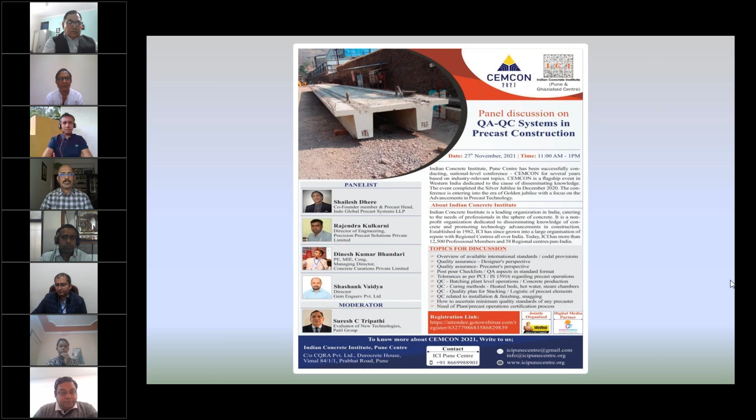The panelists for the discussion are Mr. Shailesh Dhere sir, who is co-founder member and precast head at Indo Global Precast Systems LLP; Mr. Rajendra Kulkarni sir, director of engineering at Precision Precast Solutions Private Limited; Mr. Dinesh K. Bhandari sir, CEng and managing director at Concrete Curations Private Limited; and Mr. Shashank Vaidya sir, director at Gem Engserv Private Limited.

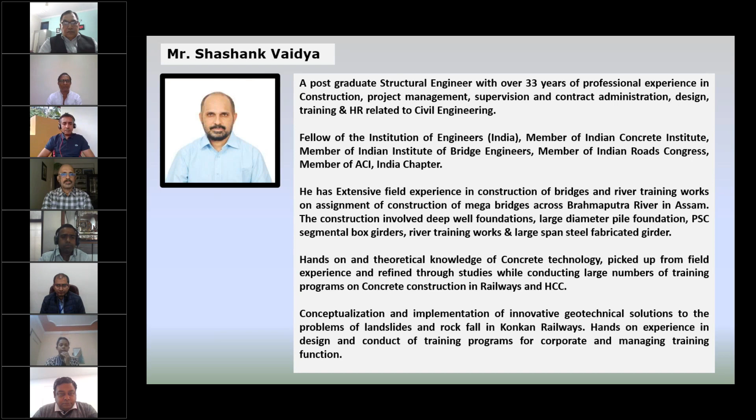Now, I would like to extend my greetings to distinguished dignitaries present with us today. We have Mr. Prasad Sevekari sir, Secretary for ICI Pune Center; Dr. Vineet Bajaj sir, Treasurer for ICI Ghaziabad Center; and Mr. Dhananjay Bhosle sir, Convener for CEMCON 2021.

From the Executive Committee members of ICI Pune and the CEMCON organizing team, we have with us Mr. Mangesh Hardas sir, Mr. Amit Hardas sir, Ms. Sujita Kalwar ma'am, Mr. Ramesh Kulkarni sir, and Ms. P. Usha Devi ma'am. We also have with us Engineer Vipin Chaudhary sir from Ultratech Cement Limited, who is Regional Head for Technical Services of UP1.

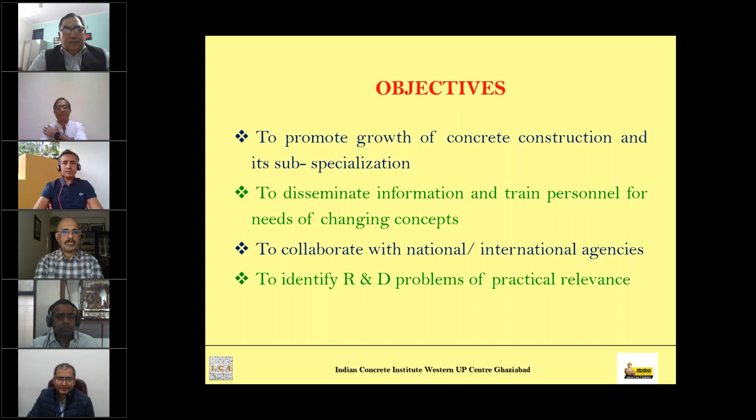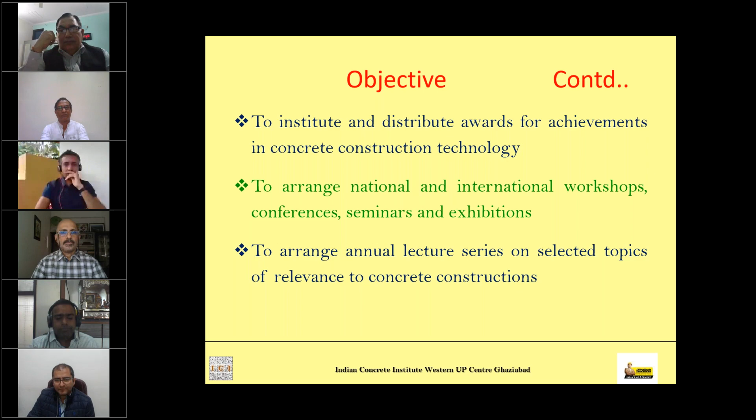In addition to this, we are also involved in instituting and distributing awards for achievements in concrete construction technology, so as to promote in-depth research in concrete, to arrange national and international workshops, conferences, seminars, and exhibitions, providing a good platform for our young generation to understand the importance of concrete and the need of the hour - how we can work on improving various types of concretes - and to arrange annual lecture series on selected topics of relevance for concrete construction.

Here is a list of the webinars which ICI Ghaziabad has conducted in the past 18 months during COVID time. The foundation basically happened on 29th of May last year. We had a 3-day international webinar on durability design and construction aspects of bridges in association with CRRI, where 18 lectures were delivered. Since then, we have been regularly organizing webinars on Saturdays, and this is in continuation to that.

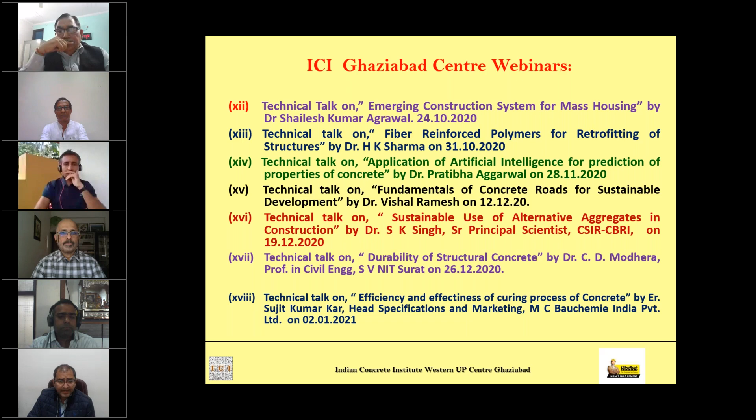Last week, this list continues, I'll skip this because of time paucity. So last week we had a technical talk delivered by Engineer KP Abrahamji, former CPWD Chief Engineer. That was our 90th lecture, titled Tale of Two Temples, and this happens to be our 91st lecture.

So for those who have joined late, today's topic is a panel discussion on QA-QC systems in precast construction. The panelists are Shailesh sir, Rajendra sir, Dinesh Kumar sir, and Shashank Vaidya sir, and the moderator for the day is Tripathi sir.

In addition to the various webinars, 7th of September happens to be the birth date of ICI concrete, and therefore September across India is celebrated as concrete month, because various technical events are happening across India. ICI Ghaziabad celebrated its concrete day on 12th of September. Sanjay Pansar from BIS, Bureau of Indian Standards, was the chief guest for the day. This is the photograph of the inauguration ceremony.

Annual award function on the concrete day - these were the few recipients of the various awards. I'll be sharing the list of the awardees, the types of awards which are being distributed on concrete day. A few of the photographs.

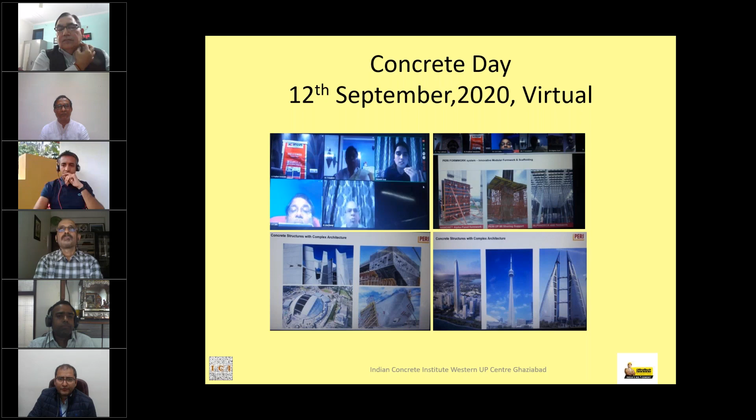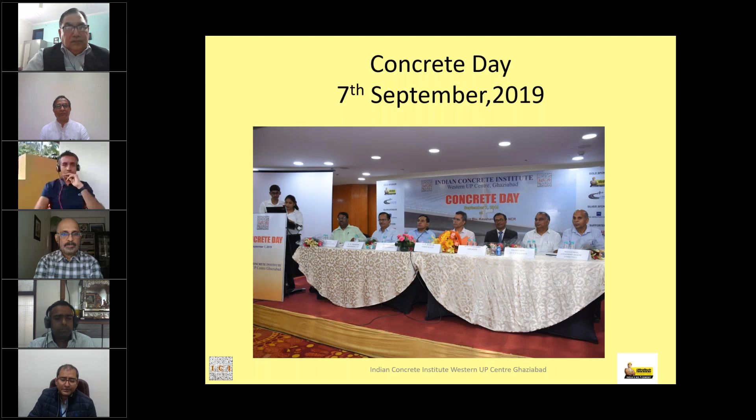Concrete day celebration last year, that was 2019 on 7th September. That was the concrete day celebration, and a few photographs. We have the chairman of that time, and chief guest for the day was KP Abraham sir.

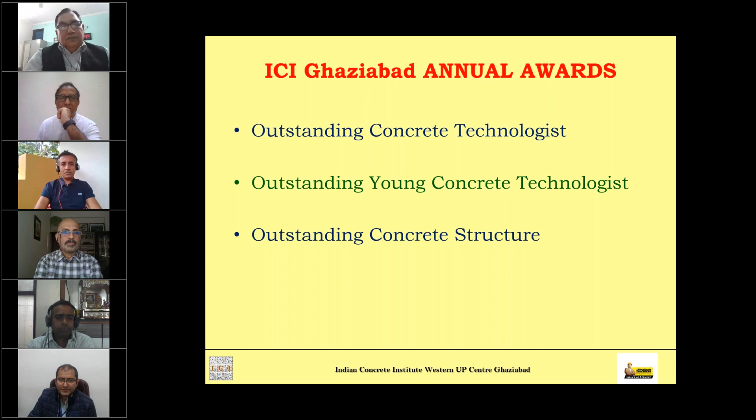ICI Ghaziabad annual awards include outstanding concrete technologist, outstanding young concrete technologist, and outstanding concrete structure. These are a few of the recipients of outstanding concrete awards.

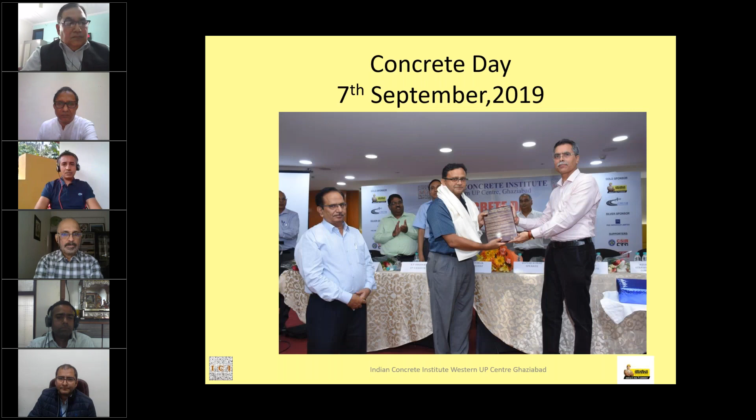The conference organized by ICI Ghaziabad was the repair and rehabilitation of concrete structure at Ghaziabad, held in May 2011. After that, we organized an international conference on trends and challenges in concrete structure, again in Ghaziabad in December 2013, wherein we had participants from across Europe, the Middle East and the US also.

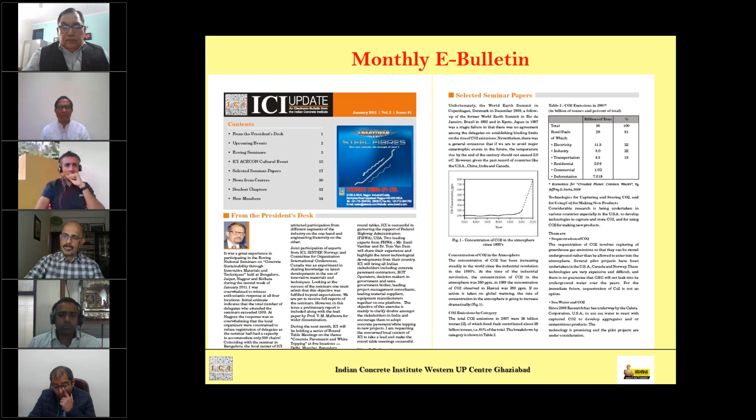We share an e-bulletin with all our members. Each member receives an e-bulletin each month with information related to what has happened in the past month in the field of civil concrete, not only in India but across the world.

The Technical Committee of ICI was constituted to formulate unified codes, standards, guidelines, and handbooks. Various ICI members are also part of BIS technical committees, working cohesively to improve the codes, standards, handbooks and guidelines. A few of the ICI technical codes cover fiber reinforced concrete, precast construction of buildings, concrete admixtures, unified code for concrete construction, recycling of aggregates, decorative concrete, alternatives to river sand, concrete durability, and concrete flooring.

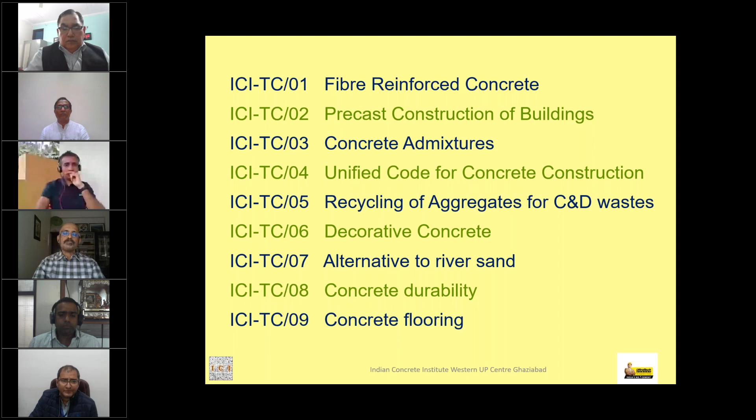These are available on the website. Those who want to purchase them can go for it.

A handbook has just been released, on waterproofing of concrete structures. In the past 1.5 years, there have been regular webinars, not only by ICI Ghaziabad but other chapters also, on waterproofing, understanding the need of the hour.

It's available for 1,500 rupees including postage charges, and discounts are available for members, or if you want to buy in bulk. All these details are available on the ICI website, and those who want to become a member of the ICI body can also visit the website.

There's an e-learning portal for education and training. A job portal is available for students who are members, where they can find new available jobs in the field of concrete or at sites.

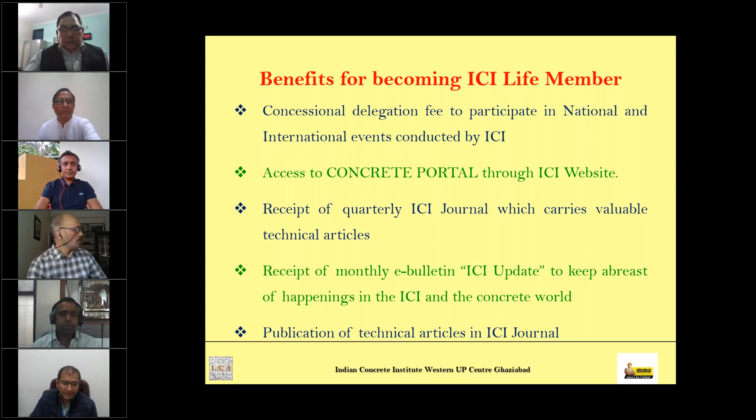Benefits of becoming an ICI life member include concessional delegation fees to participate in international and national conferences organized by ICI, access to the concrete portal on the website, receiving the quarterly ICI journal as well as the e-bulletin, publication of technical articles in ICI journals, publications at concessional rates, access to the ICI reference library, and support from ICI to conduct training.

As a professor at SRM University, I'll add that once our university became an ICI member, they helped us organize various industrial visits, and this is one of the supports provided by ICI, with webinars free for my students to attend, along with participation in ICI technical committees.

Above all, ICI events provide a uniform platform to learn and share the best practices in making good concrete, where sellers and buyers meet together.

Benefits of becoming an ICI organization member include concessional delegation fees for institution members, receiving 2 copies of the quarterly ICI journal, and receiving the monthly bulletin.

Regarding the student chapter, the clear objective is to bridge the gap between knowledge and practice, that is academia and industry, to keep students informed of happenings in the field, and to prepare them to face challenges in their career.

Through ICI web events, wherever there are chapters, student chapters are invited to participate in various events, thereby helping them directly interact with academicians, industrialists, industries, or consultants working in the field of concrete.

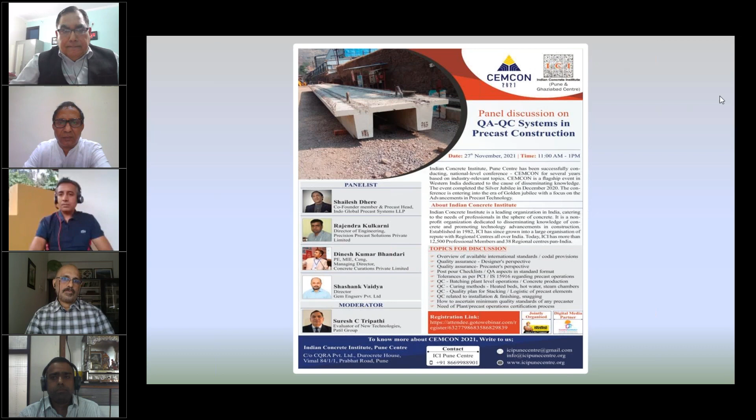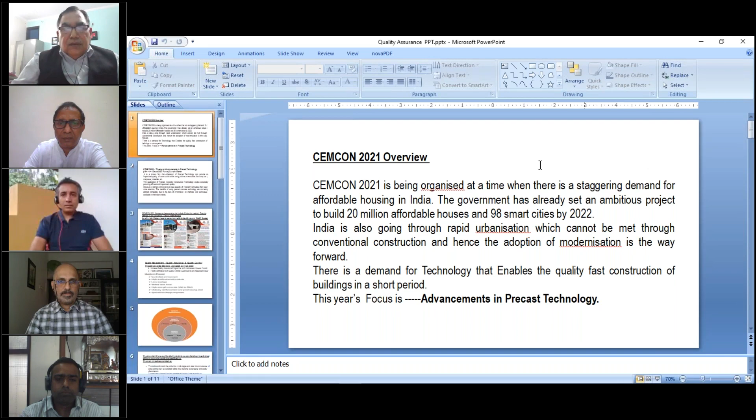This event is basically a curtain raiser for CEMCON. CEMCON 2021 is being organized, especially in Pune, and one of the themes for this year is advancement of precast technology. As a curtain raiser, we did this. Next slide, please.

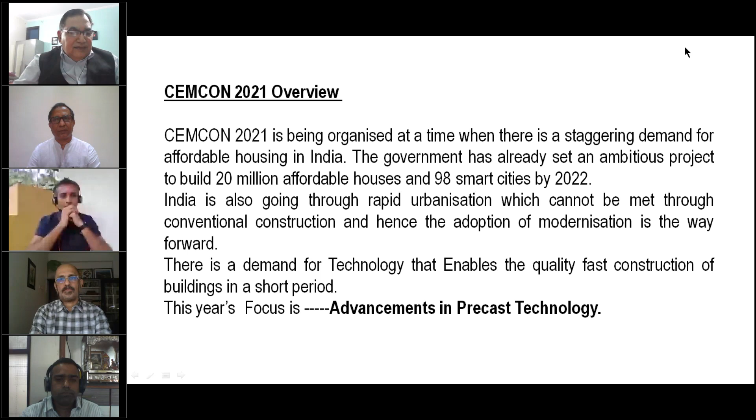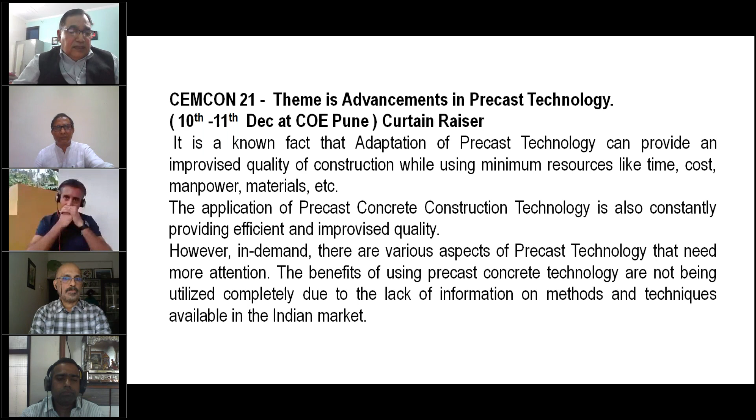In this, we are focusing on precast technology because most people here understand that precast technology provides improvised quality of construction using minimum resources like time, cost, and material. We all know it constantly provides efficient and improvised quality. But we find that a lot is still to be done, and the benefit of precast technology is not being utilized completely because of lack of information on methods and techniques available in the Indian market. So to address this, we organized a series for this. Next slide, please.

So in this, we had taken up various topics on this platform, and 3 events have already been done, and today is the 4th event on QA and QC systems. Next slide, please.

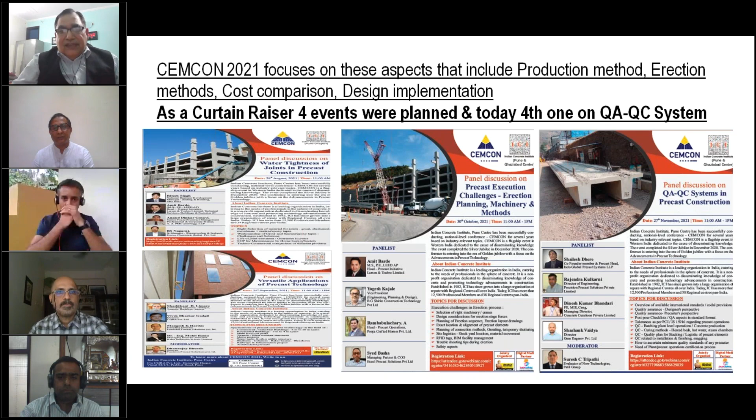So if you look into the quality management, assurance, and quality control of precast members, there are 2 basic levels in which we have to understand things. One is the in-house quality assurance program with continuous in-house control. The second is plant certification and quality control supervised by an independent body.

To start, I would come to Shashank Vaidya sir, who has great experience in the PMC side of precast projects as well as the cast-in-situ side. One of the questions I would like to ask Mr. Shashank Vaidya sir is: what is the fundamental difference you find in the quality management systems of precast and cast-in-situ, which is creating issues? Please, sir.

Can somebody make sure my screen is visible? Yes, sir, it is visible.

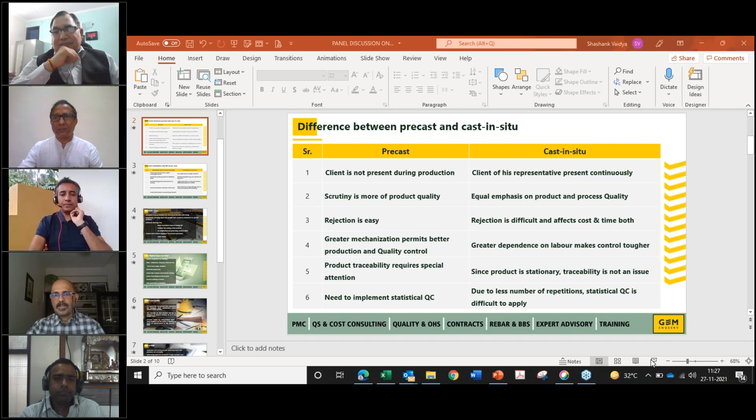I would like to show a slide which lists the fundamental differences between quality management in precast versus cast-in-situ construction. Any effective quality management system must account for these differences, because they influence the behavior of different stakeholders. Amongst all factors, one of the most fundamental differences in precast is the presence or absence of the client or client's representative.

In cast-in-situ construction, the client's representative, often a very large team, is always available at site almost 24/7, continually seeing the quality of incoming materials, the process, and the end product. This is completely missing in precast. The client's presence is virtually absent until the client receives the product at his premises, at site or wherever erection takes place.

So the fundamental difference is the precaster has far greater responsibility, though he has freedom in that nobody is looking over his shoulder every hour or every day. He has great responsibility to deliver a product which meets requirements. Second, because of this, there is greater emphasis on product quality, as compared to equal emphasis on process and product quality in cast-in-situ. I'm not saying process quality is not important—I'm saying the client does not interfere or supervise it at a micro level.

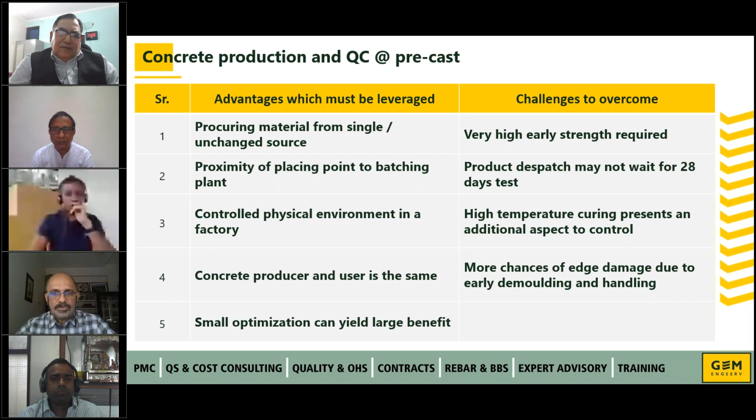Yeah, okay. Let me take a second to change to a different slide. I hope I have a slide on that.

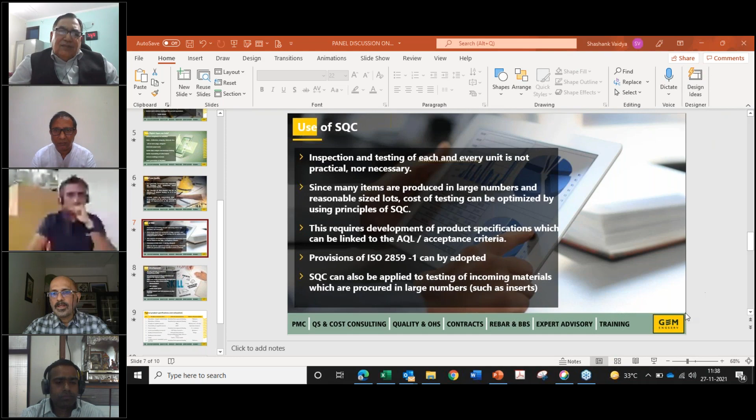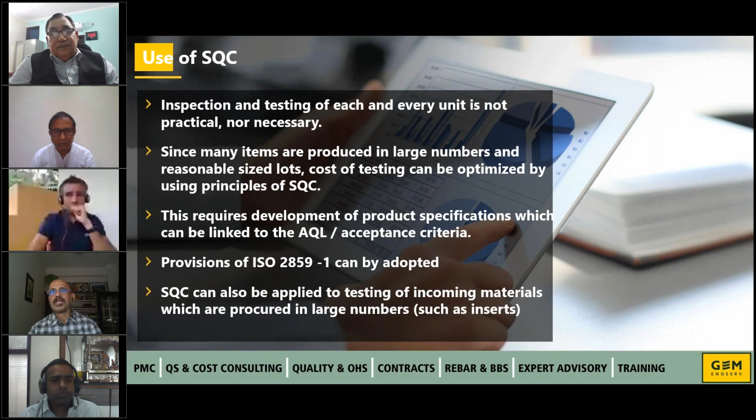Normally in cast-in-situ construction, we are not much worried about statistical things, because every time you are not able to get that data. Statistical things are more used in manufacturing plants, so we need to have a manufacturing mindset while using this. Absolutely right, precast is more closer to manufacturing or factories rather than conventional cast-in-situ or site-based construction.

In conventional construction, because the client is perpetually present, they can afford to do almost 100% checks, and therefore the concept of statistical QC has not seeped into civil engineering practices. In precast or mass production, when you are producing thousands or lakhs of items, it is neither feasible nor economically possible to test every unit, and it's not required, because the consistency of quality in a factory is far superior to what you can ever achieve in cast-in-situ construction.

So this advantage of producing the same element again and again for thousands and millions of times, we must leverage using concepts of statistical quality control. As I explained earlier about the fundamental difference between the two systems, in precast construction it will be the product specification which governs, because the client at best can do a product check or product testing. Therefore we need to develop crystal clear product specification and acceptance levels for each parameter of the product, covering a number of different parameters.

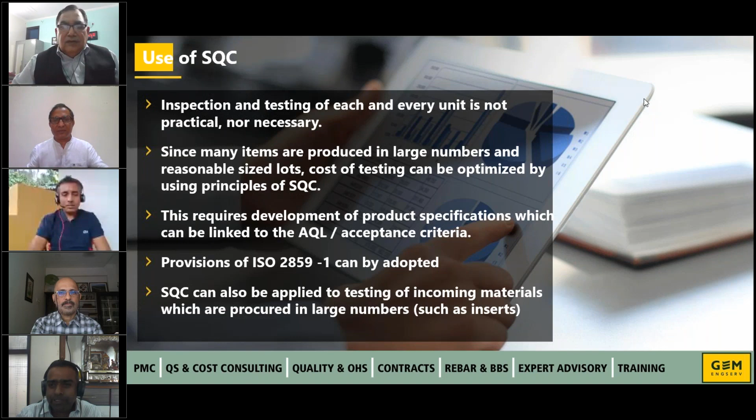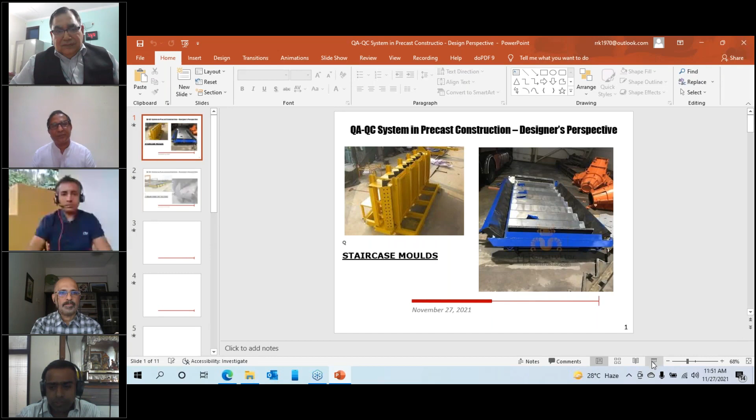Okay, can I share my presentation? Can I get the presentation right? So can you see the screen? Yes, please, we can see.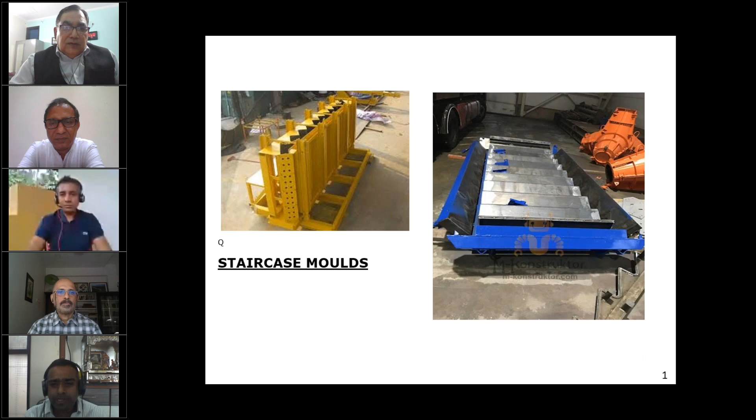So from the designer's point of view, the design of an element starts first with understanding the precast plant specifications. If you see precast plants, there are different types of molds available for each element. Even staircases, now I'm showing on screen, can be cast on edge, or cast inverted like this also. Two types of molds are available.

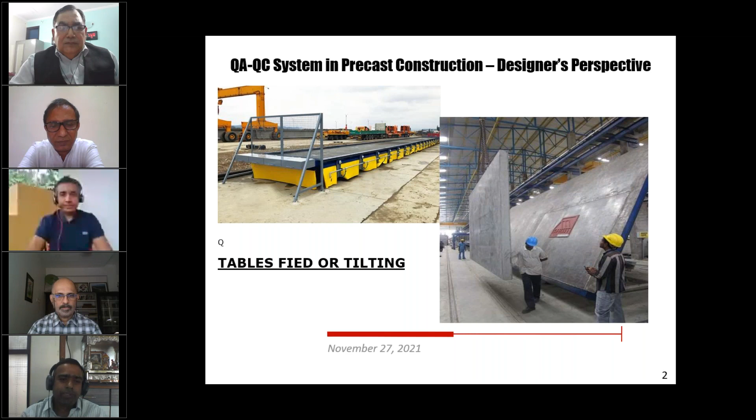If you see tables also, we have fixed tables or tilting tables for wall panels, both types are present in the plant. If you see the culvert mold also, it can be cast in vertical position or horizontal position. So depending upon the plant specifications, these elements are subjected to various additional stresses.

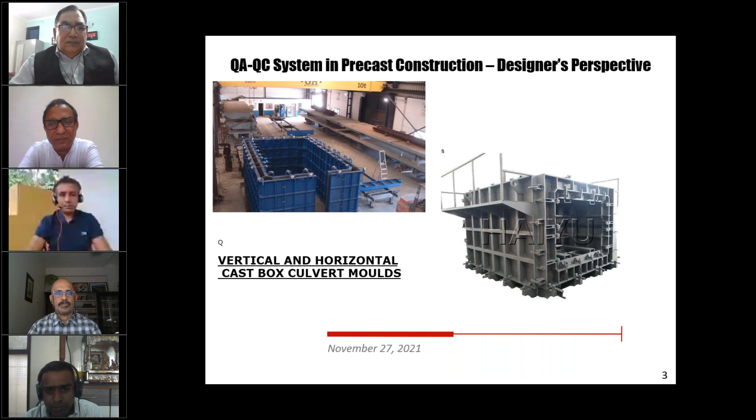Now, if you see these precast staircases, if the mold is an inverted mold, then the additional forces coming while demolding will be totally in the opposite direction compared to when the staircase is serving at its place - meaning the basis of tension and additional reinforcement will be required. So from the designer's point of view, all this needs to be taken into account while designing the element, and plant specifications are taken care of.

And we have to prepare the drawings - how it is demolded, then how it is rotated, how it is placed in position at the plant, and how it is stored like this. So the first thing is design for the plant process, meaning while demolding and placing it in position.

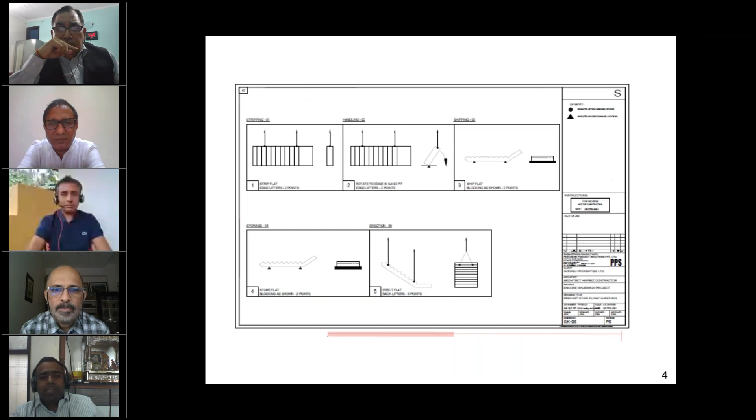Second perspective is transportation. So in transportation also, the designer's intent is to transport the element the way it is placed at site. But we have restrictions of size, then vehicle sizes, classes. So we may have to put the element in a different way than it is put at site. So that also we have to take care of while designing the elements.

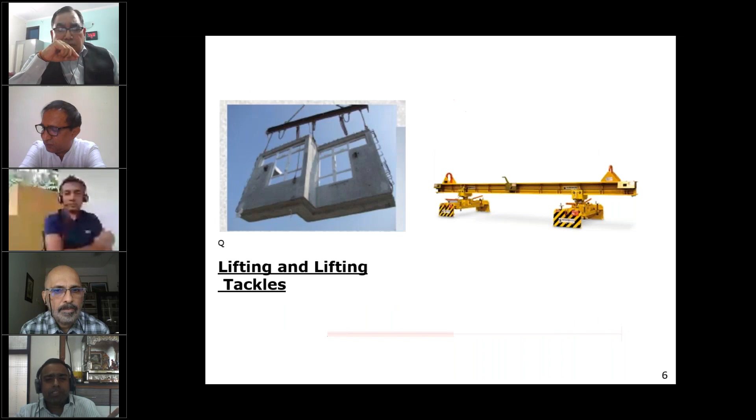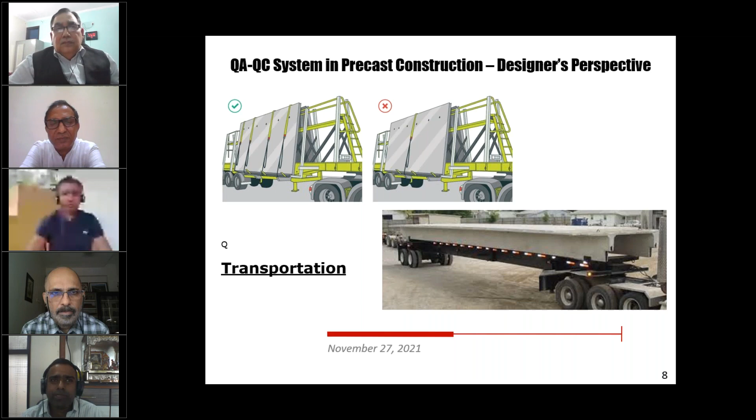Suppose wall panels are there - it is intended that wall panels are transported as verticals. If slab panels are there, it is intended that slab panels are transported as horizontals. Then the supporting positions should be such that they are considered in the design. So apart from plant specifications, while transporting the element, generally we give drawings on how to transport it, how to support it on the vehicle, so that no additional forces are coming, or the forces which are coming are taken care of in the design.

Then some elements, as I'm showing here, are very thin elements with cantilevers and all this. So while designing itself, we have to take care that it doesn't get damaged while transporting. So we have to put braces like this while transporting it.

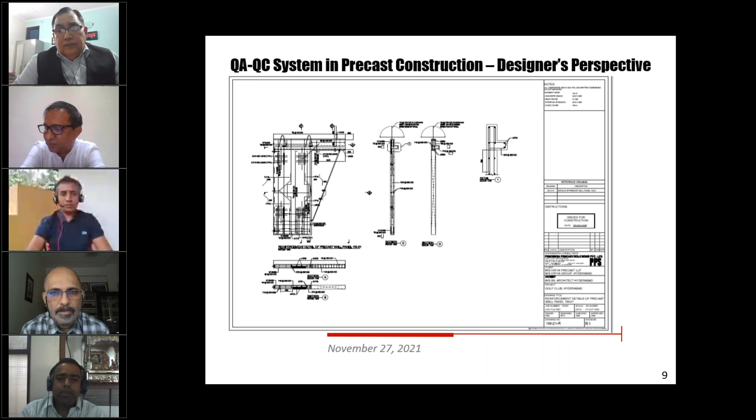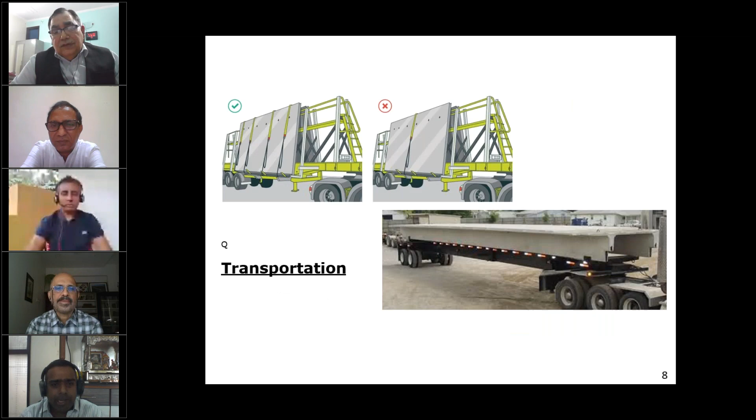And the last aspect: during erection, the designer has to give specifications for erection stability. Suppose the beam is erected, and after that we are putting hollow cores on that. While putting the hollow cores, it is subjected to different stresses and forces, so we have to take care of that. Erection dowels have to be put there, and they have to be designed for various forces.

Apart from that, propping is required for beams or slabs, because it is a half cast slab, so the propping requirement is there. That also has to be taken care of during erection. So all these details, apart from the standard capacity drawing, are very much needed in precast design - that is, how to store it.

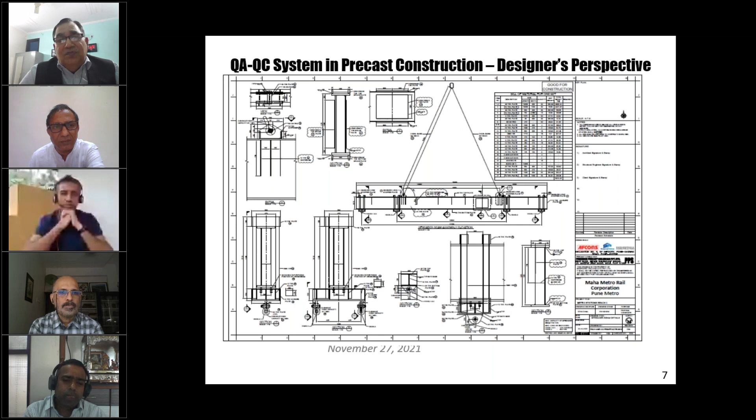So this means there is a lot of difference between what you design for cast-in-situ concrete and precast concrete. Correct, for precast concrete, the detailing and the methodology - everything is mentioned on the drawings. So it makes the designer's work many more times complex than what you do for cast-in-situ structures.

Correct. All these things should be in the shop drawings - where the lifters are positioned, how they should be lifted, how the element should be handled, how the element should be stored, how the element should be erected, how the element should be supported at site while erection is going on. In cast-in-situ concrete, it's about grouting and joint filling. So all these aspects should be very clearly mentioned in the design drawings, which are different from cast-in-situ.

Okay, that's perfect. Now, the way you've mentioned here, the drawings have to keep each and every aspect of it mentioned on the drawing. So it gives a very important role to the person who is able to read the drawing correctly. That is very important - the skill level of the person is very much required, and the training to read such type of things and adhere to these type of specifications which are mentioned in it.

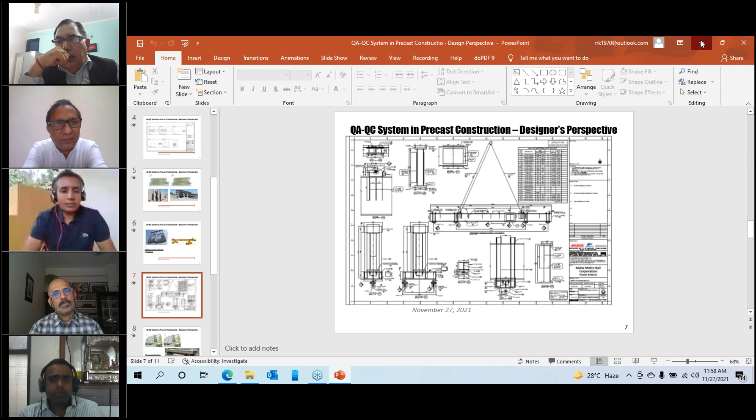So what I feel is that there is so much complexity in this - in India, since I've been into precasting for so long, we don't have much standards available here. So I will come to Dinesh sir, who has great experience worldwide, and I would request him - what is his perspective on this? He has had international experience in precasting and certification of the work. Certification is very important, because everyone here in India is working in their own silos. So how can we combine together the specifications and how the factory is set up, the plant configuration - how you are managing the plant configuration in Western countries, since most of the experience we are drawing from is from Western countries only. So how is the structural certification done? I would like you to throw some light on the factory setup and the structurals and the PCI, because of the PCI which is there.

Yes, so I agree with you that the design aspect is very, very important, and there's so much people need to put on the drawings, and like you said, you need skill level to read those drawings. It's not easy when you're looking at so much information on one drawing, so there has to be consistency in the drawing. So if we standardize products - PCI is a US body which is into this kind of standardization. It should not be watered down to a level where a layman can do the designer's job, but with so much repetition, there's so many people continuously doing the same things.

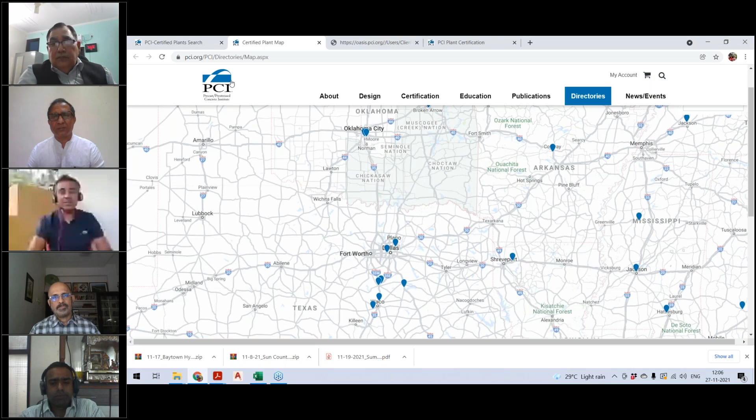So this is with respect to the plants. PCI also certifies plants. They certify the erectors. Most of the times, it's a separate process where the erection is done by some other person, and the plants only manufacture. In India, because of the new concepts with precast, the precast manufacturer does everything, which is okay to some point, but in the long run, it is a capital intensive market. You need to own your own cranes, your own crew, your own transportation systems. Everything is in one place, and that becomes a large business to handle. With PCI, the plants only manufacture. They either do FOB or delivered at site, depending on what process they go with.

And then there's personnel. PCI also certifies personnel. So I've opened this page here where they show you the levels of certification they do. One is level 1 quality control technician inspector certification, then level 2, level 3.

Is it mandatory to have this type of certification for even the technicians to have the certification of the plant? Yes.

So every time PCI certifies a plant, they will need one or two or some number of people at every level. So if you are just in production, you need to have certified people at all three levels, level 1, level 2, level 3. Only then do you get the PCI certification for the plant. If you're a certified erector, it's the same thing. You have a certified field auditor, certified company auditor. You need to have a person with that knowledge or certification if you want to be a PCI certified erector. So this also gives a benchmarking figure of the skill set available with the company or the people available for doing that type of work.

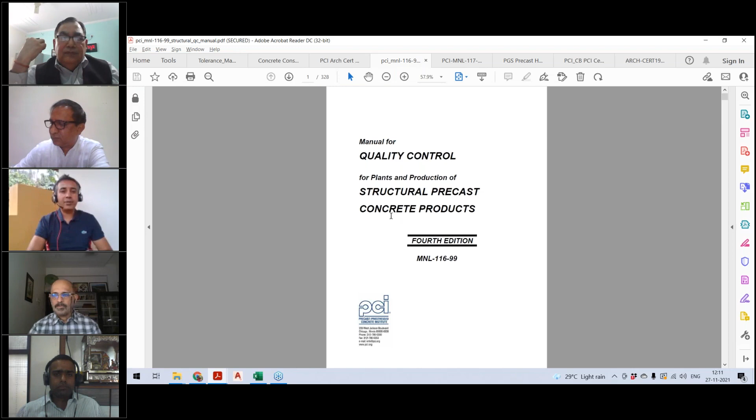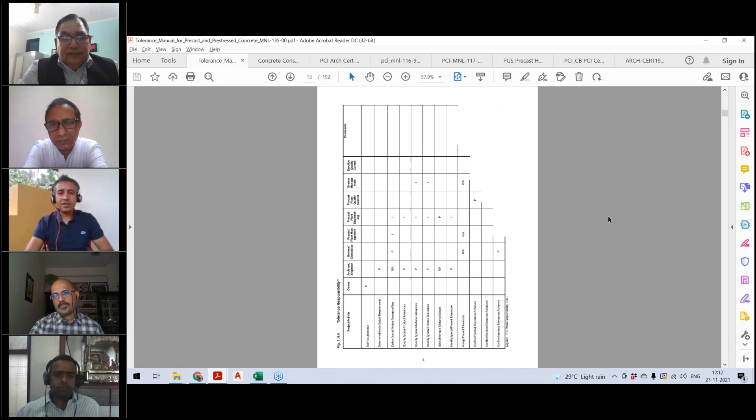So they have a manual for quality control for structural precast, and they have a manual for quality control for architectural precast, because architectural precast is a little bit more quality oriented, and the levels are higher for that. If you go to any of these manuals, they'll tell you how the process is done, the relationship of project tolerance to functional requirements, with good diagrams.

Anything above that, there has to be an intervention. You need to do something with it, either cut those slabs to match the dimensions or stuff like that. So this is a good base to start with.

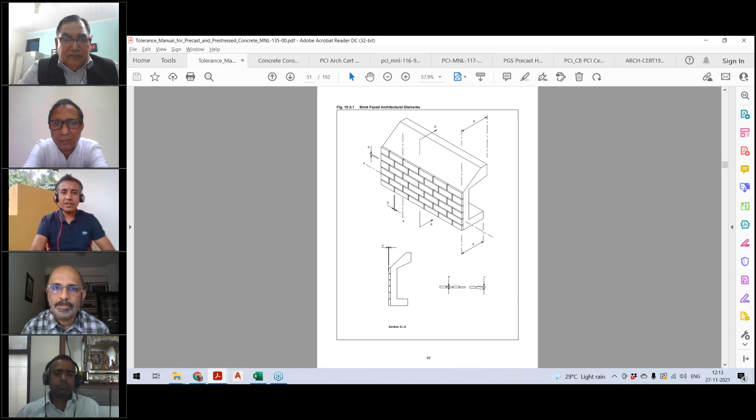So when somebody's starting, or managing a project, if the precaster does not have any kind of QC dossier or QC document which they are submitting to you, you can say, okay, let's open the PCI manual and see what they've given. Every individual product is listed there, like this architectural brick facade, with diagrams and proper dimensions, and you can look at everything and control it. So this is a good starting point, even for Indian ICI to adopt this.

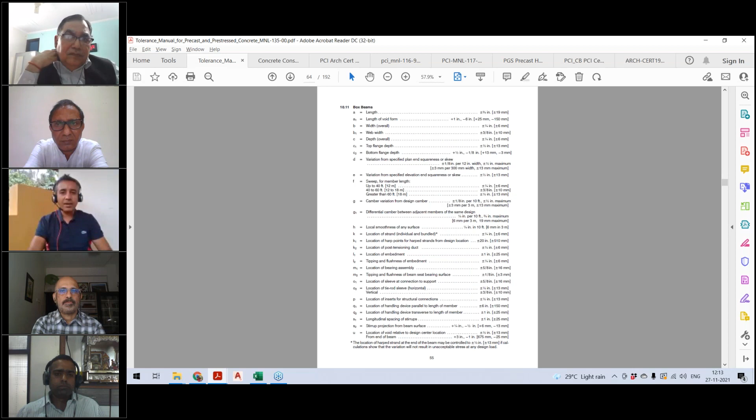PCI does not stop anybody from adopting it. So ICI can take this as a starting point and make it our own. We don't do some of the products which are done there; based on Indian conditions, whatever products we do, we can look at this.

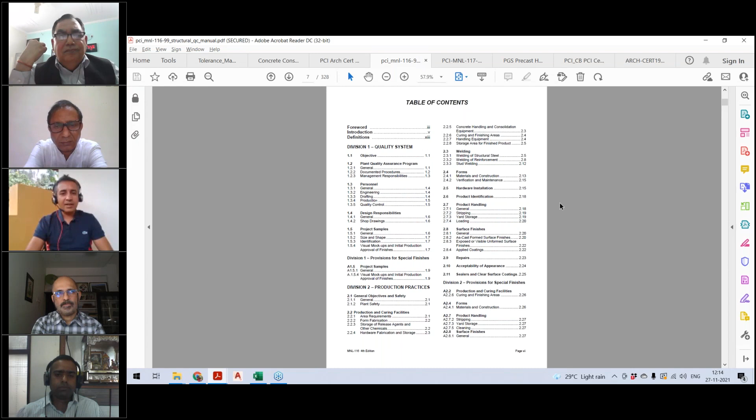The same kind of things, the QC manual will tell you about—the tolerance manual and the quality control manual, where they give everything: design responsibilities, special finishes, production practices. All that is available. If people go through this and read it, I think it gives a very good perspective of how it's done.

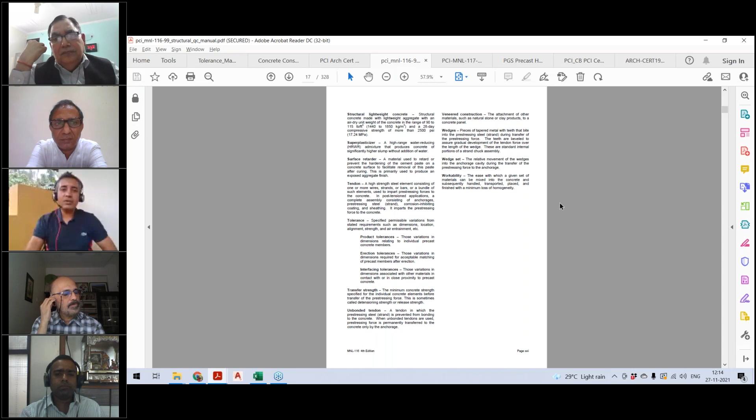And we don't need to reinvent the wheel. It's already been done, not just by PCI. If you look at FIB, the federation of concrete in Europe, or New Zealand standards, or even Singapore—NPCA is also there, CPCI, the Canadian Precast Concrete Institute, which is good. Singapore has very good standards for precast concrete as well. So you just go through all these documents—there's so much to read and learn from what's already been done.

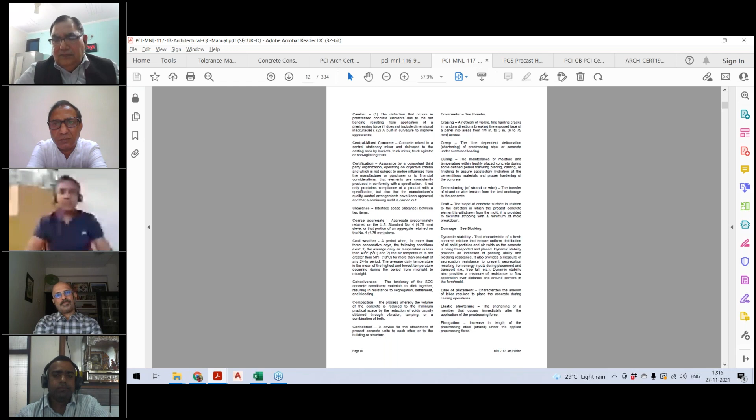The new thing PCI has started recently is architectural certification. Previously they only had one type of certification for architecture. Now, with so much demand from architects for iconic structures in the US, they decided they need to tighten the bandwidth here to see who is good for certain things—categories A, C, A, D.

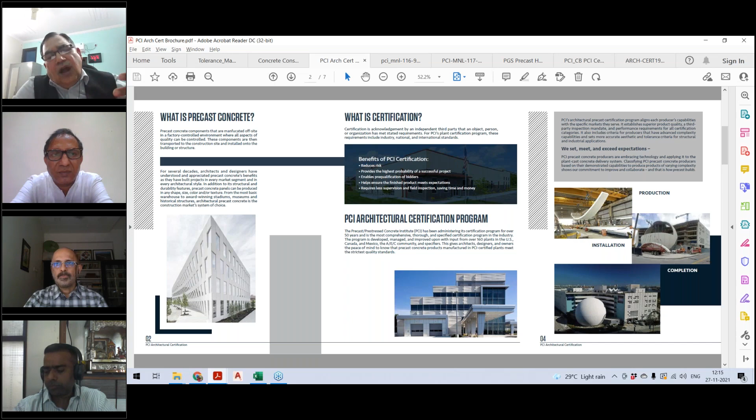So what I feel is there is so much data involved, especially for everything we have to collect data in this. So how can digitalization help us? Shashank sir, can you throw light on this, because so much QC has to be done, so many measurements at site also - say, suppose grouting is there, double tube grouting is there, how do we know how much grouting has been done or not?

As a third party doing quality assurance in projects, how do you manage so much data, and because you have to certify, your responsibility becomes much higher since you are the certifying agency in some cases. So how do you control things as a third party, or use digitization in QA/QC systems? I would like to understand from you, sir.

Sure, thank you. I think it's a very relevant subject. Is my screen visible? Yes, sir. So as you rightly pointed out, we are doing a lot of third-party QC, and we ourselves have been developing digital apps for quality control, or you can say quality management.

But we haven't done this for the precast industry as yet - we have done this for cast-in-situ construction. But I believe the principles and advantages that apply to digital technology in cast-in-situ would equally, if not with even greater returns, apply in precast technology.

One of the biggest advantages we have noticed is by embedding the workflow that is expected to take place in the field into the digital app, we can ensure there is no deviation from the workflow. So if anybody wants to do anything without an approval that is part of an approved process, an alert can easily be created - real time, in-time, immediate alerts.

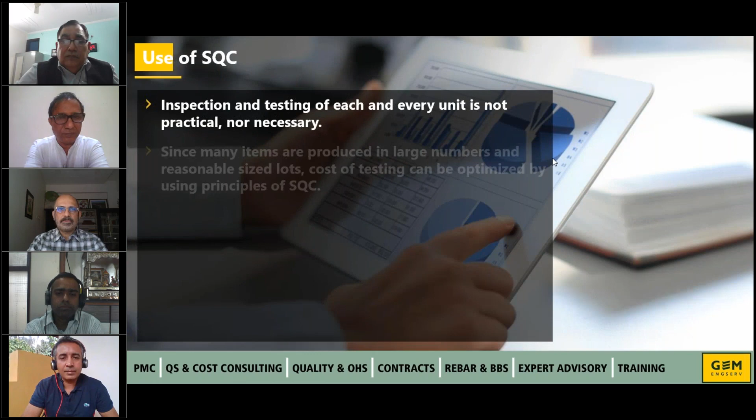There's also a huge advantage, and you rightly pointed out, about the data. I'm sorry, I think I have something else.

So as far as data is concerned, in the conventional system the data is all manually entered into checklists, and there is a lot of difficulty. The data is generated at a construction site, and you cannot carry a device - it's difficult to go and do the work and at the same time capture the data. So generally engineers note down something in their diary, and then come back and enter it in the checklist or in an Excel sheet.

Using a digital app, this process of collecting data becomes absolutely easy, because you need only a smartphone, which everybody carries to the site. Second, the integrity of the data is assured, because whoever entered the data, it is traceable to that person, with a date and time stamp.

Somebody cannot then overwrite, replace, or change the data once it is entered. So data integrity is extremely important, and data will not be lost, because apart from being saved in the memory of the cell phone, it is also instantaneously uploaded to a server, and it's there for life. Because of that, retrieval of the data becomes extremely easy and quick.

The data is available to all the stakeholders. The same data is available to every stakeholder live, 24/7. Whoever has been given the authority to use the app, either as a user or at least as a recipient of information, everybody has access to the same set of information.

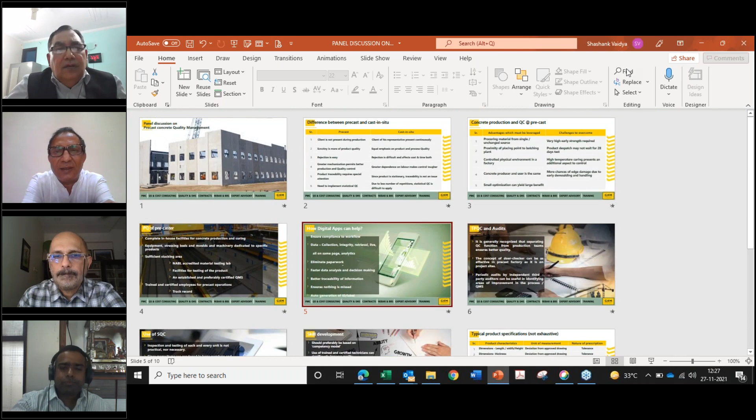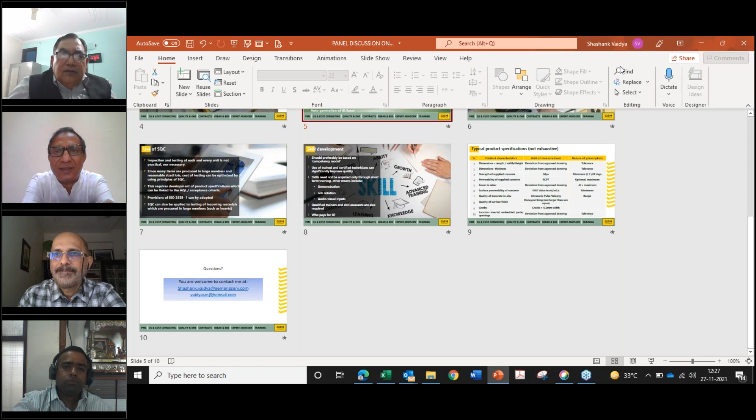As Shashank sir was rightly saying, the system has been implemented at Precast India Infrastructures, Pune, where I am associated as Chief Technical Officer. We have been working with the track, and that system has been implemented. It works very well, and there is total quality control with it. It is a very good system. So practically you have experienced it, so you are happy about it. I think it's a great confidence booster. Okay, yes, that's fantastic.

Rajendra sir, can you throw some light on this, like digitalization, especially with the use of BIM models, and how we can control the quality and the assurance? Basically, it is more on the assurance part, because the process and other things can be well controlled, put up to the management and also the elements. So how do you see that?

Yes, as rightly said by you, building information modeling is the new way now to achieve all this in design also. Nowadays the complete detailing of the precast element is done in a 3D environment, whether it is a BIM platform, Revit, or Tekla. So almost the whole structure is virtually built on the computer first.

All the clashes are removed, and then it is sent to the plant and then to site. As far as we are concerned, we are almost now on a 3D platform, BIM platform, Revit and Tekla. We have stopped doing it in 2D now. Digitization has helped a lot in detailing also. Building information modeling helps us not only in detailing, but it is taken to the site also for construction progress monitoring, then even for commercial monitoring also, and to the next quality monitoring also, to the next level.

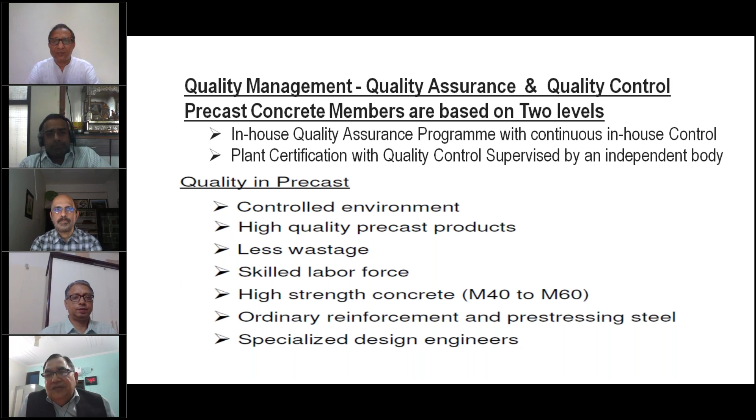Right, perfect, correct. Okay, so is my screen visible? Yes. Let me sum up the things. I think we have covered most of the points. To sum up, any precast plant must have a total precast quality management as a complete overview. There should be assurance, and this is the complete quality circle. Quality control must have three factors: detect, act, and validate.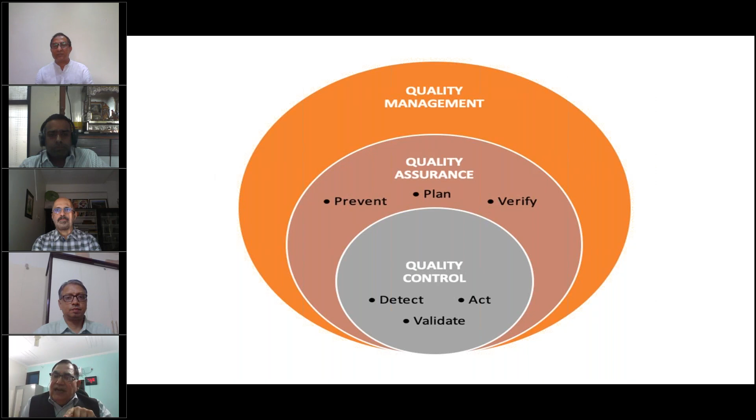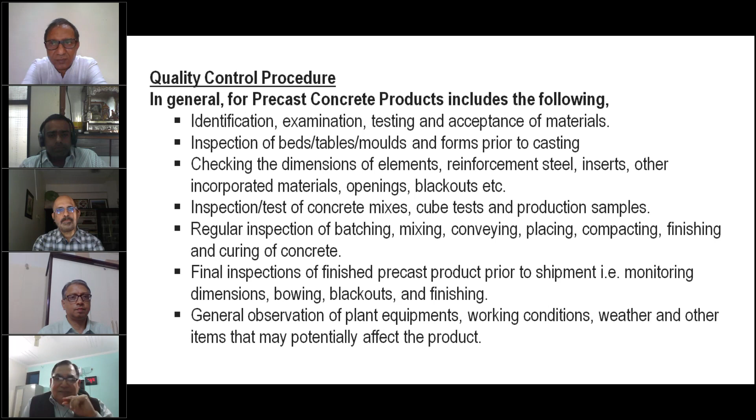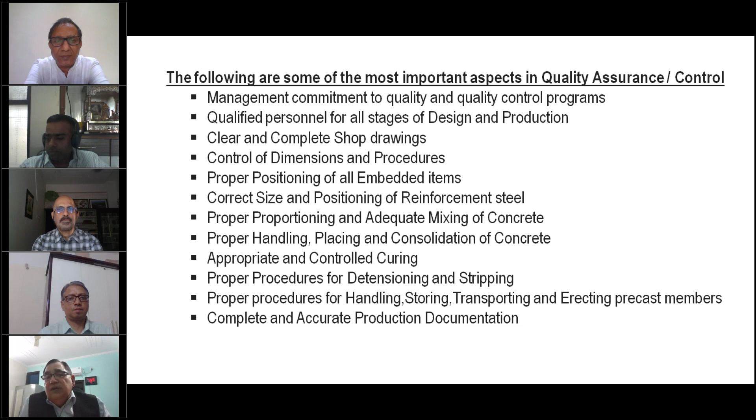Now, coming to the conclusion, I would say we cannot just say this is production, my job is only production, someone else handles reinforcement, someone else handles transport. It is complete - as a company, quality becomes everybody's responsibility.

Either you play your part in it, or the whole plant or whole ship is going to sink. So nobody can feel happy by just saying I'm doing a great job. If the designer only says I'm doing a great job, but all other aspects are not being looked into, the ship is going to sink.

My submission is that QA and QC should be taken very seriously, and it plays a very important part in precast. To know further, I would request the audience to join us at our SEMCON in Pune, which is happening on the 10th and 11th. With that, I conclude.